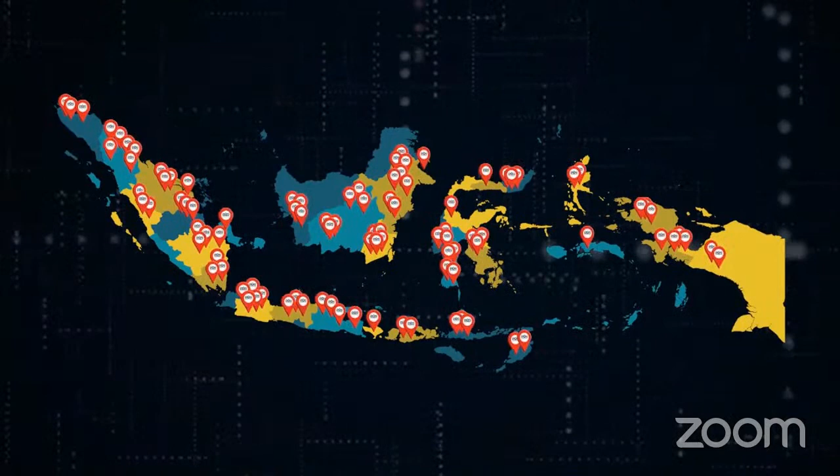PT Multibangun Rekatama Patria adalah perusahaan nasional yang bergerak di bidang industri geosintetik. Sejak didirikan pada tahun 1998, perusahaan ini telah menangani ratusan proyek yang tersebar di seluruh Indonesia. Dengan pengalaman yang dimiliki, menjadikan PT Multibangun Rekatama Patria dipercaya menangani proyek-proyek dari perusahaan multinasional milik pemerintah dan swasta. PT Multibangun Rekatama Patria selalu menjaga kualitas material dan pekerjaan dengan didukung oleh tim yang kompeten dan berpengalaman di bidangnya.

Visi PT Multibangun Rekatama Patria adalah menjadi pemimpin pasar dalam industri geosintetik di Indonesia yang selalu bersaing dengan sehat. Misi PT Multibangun Rekatama Patria adalah menjalankan kegiatan perusahaan dengan standar etika yang tinggi dan bermartabat disertai dengan kejujuran dan integritas. Meningkatkan kesadaran pengguna produk geosintetik untuk memilih produk dan solusi yang tepat atas masalah proyek yang dihadapi. Menjual dan melakukan pemasangan produk-produk geosintetik yang berorientasi pada kepuasan pelanggan dengan memberikan pelayanan berupa material berkualitas dan jasa pemasangan oleh tenaga-tenaga ahli dan berpengalaman. Mengembangkan perusahaan dengan sumber daya yang modern dan profesional.

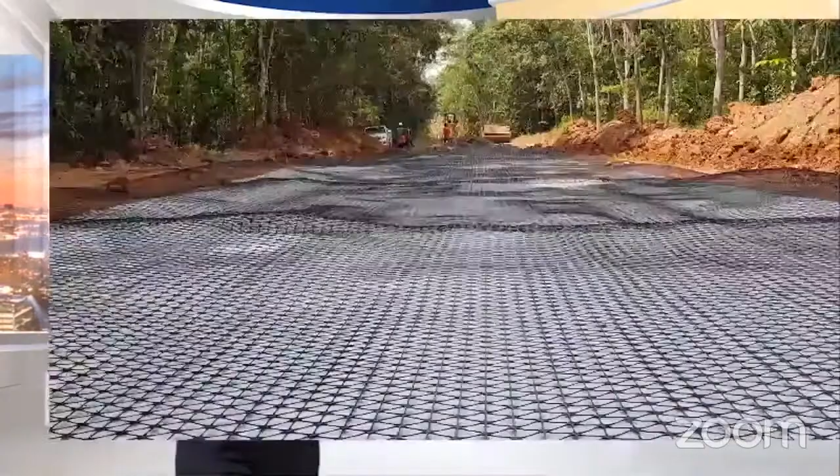Produk-produk PT Multibangun Rekatama Patria. Produk Tensar System terdiri dari Geogrid TriAx, terbuat dari bahan polipropilin berkualitas yang berfungsi sebagai stabilitas tanah dasar, khususnya pada tanah lunak. Multi-block retaining wall system merupakan sistem konstruksi dinding penahan tanah segmental, perpaduan antara modular blok beton sebagai facing dan tensar uniaxial geogrid sebagai perkuatan tanah.

Geomembran. Geomembran terbuat dari polimer plastik yang bersifat kedap terhadap cairan. Kami juga menyediakan produk-produk geosintetik lainnya seperti geotekstil, material drainase, serta geosintetik clay liner yang menjadi solusi bagi proyek-proyek Anda.

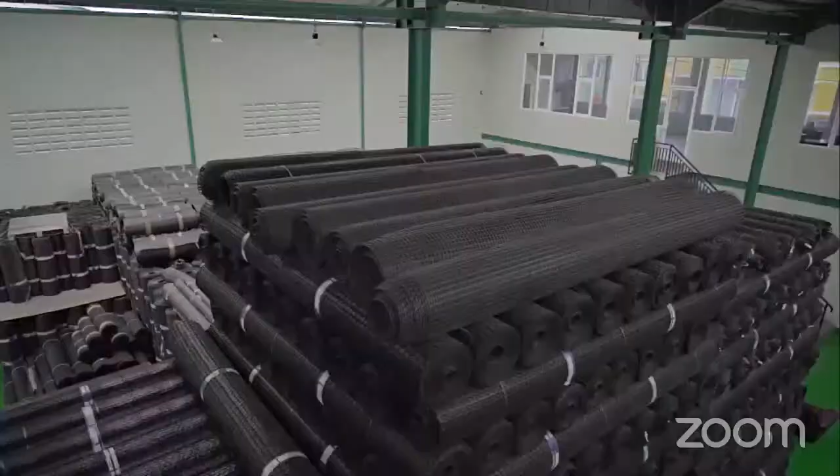Gudang PT Multibangun Rekatama Patria hanya 5 menit dari gerbang tol Bitung Tangerang, sehingga memudahkan akses pengiriman material. Gudang PT Multibangun Rekatama Patria terletak di kawasan pergudangan pengembangan kawasan terpadu 2, Bitung Tangerang, yang mempunyai luas 3.300 meter persegi yang dapat menampung material geosintetik dengan pengaturan dan penyusunan material yang tertata rapi.

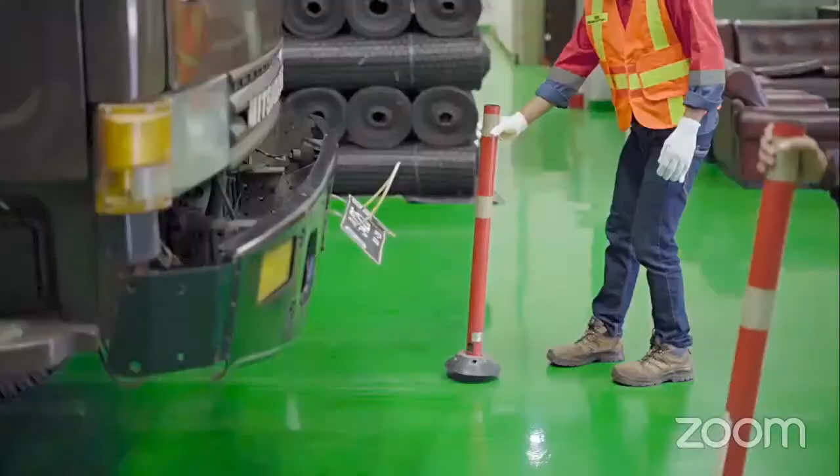Serta pengoperasian alat dengan tenaga profesional. Kami pastikan material geosintetik tetap terjaga kualitasnya hingga sampai di lokasi proyek. Selalu ready stock dan pelayanan profesional adalah komitmen kami.

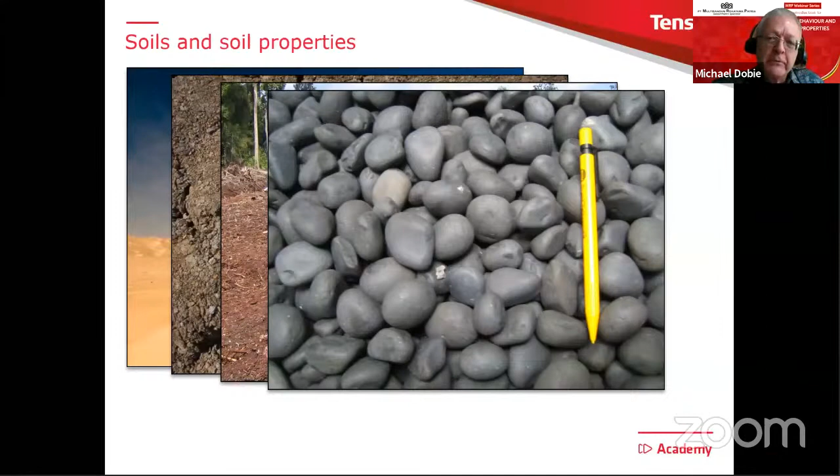So, soils. Soils are incredibly varied materials. We see some interesting pictures here: a sand dune, an expansive soil, peat, a river gravel - you can see it's rounded - and a microscopic view of clay minerals. I think what you can see from those five pictures is that soils are very varied, so understanding their properties and using them as engineering materials requires a very good level of understanding of how these materials work.

I'm just going to put a timer on so that I know where we've got to.

So, who should be listening to this webinar? Well, first of all, I should say I'm not trying to teach soil mechanics. What I'm trying to do is provide some basic information, and I want to illustrate it with examples from real soils and real experience. If you like, it's some of the lessons that I've learned over many years, which I think are important. There'll be a mixture of some simple explanations and also some more advanced concepts.

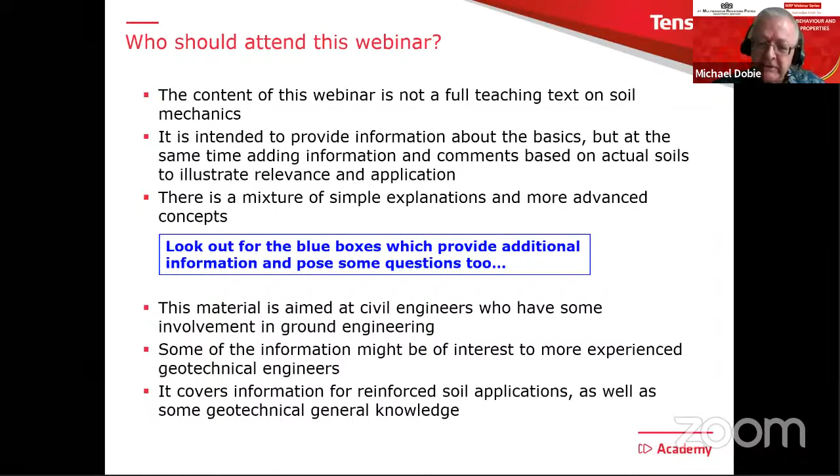Please look out for these little blue boxes. The idea of these blue boxes is that they will either add some extra information or maybe pose a question, and maybe that question could be part of the quiz later on. This is aimed at civil engineers who have involvement in ground engineering, which, to be honest, should be most civil engineers. It might be useful or interesting to more experienced geotechnical engineers too. Although I'm really concentrating on fills, especially fills to be used for reinforced soil, there's a lot of general geotechnical information presented as well.

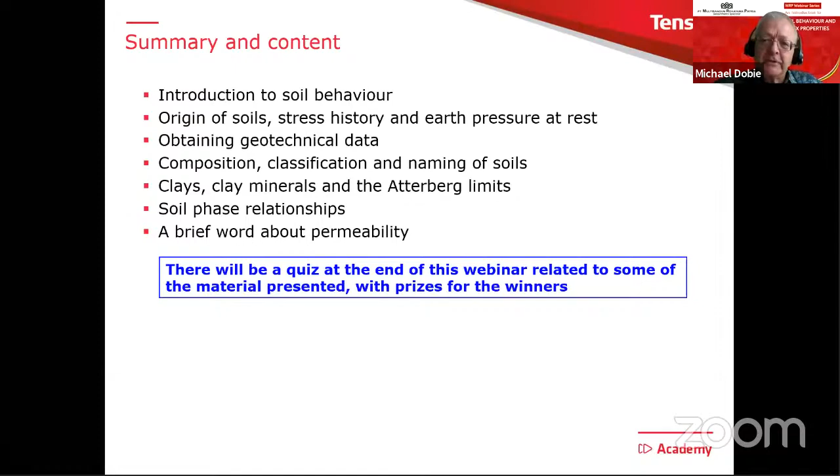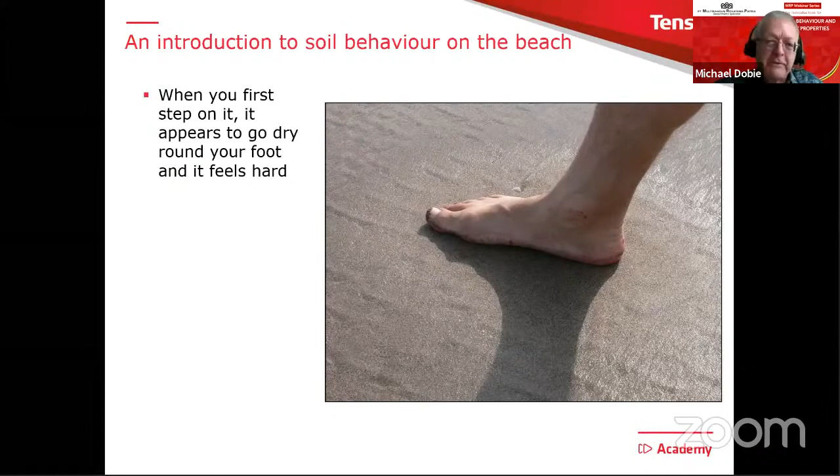There is this sand with a film of water on top, and down comes your foot. When you first do that, two things happen: first, the area around your foot goes dry - the film of water disappears and it feels hard. It's really interesting to try that out one day if you're walking down a beach in that particular location. Then when you lift your foot up, you'll see a little film of water left behind.

So let's do it again, just to be quite sure. Down goes your foot. With any investigation, you've got to be a bit careful about your boundary conditions, and in this particular case, something went wrong - that was a failure, that experiment.

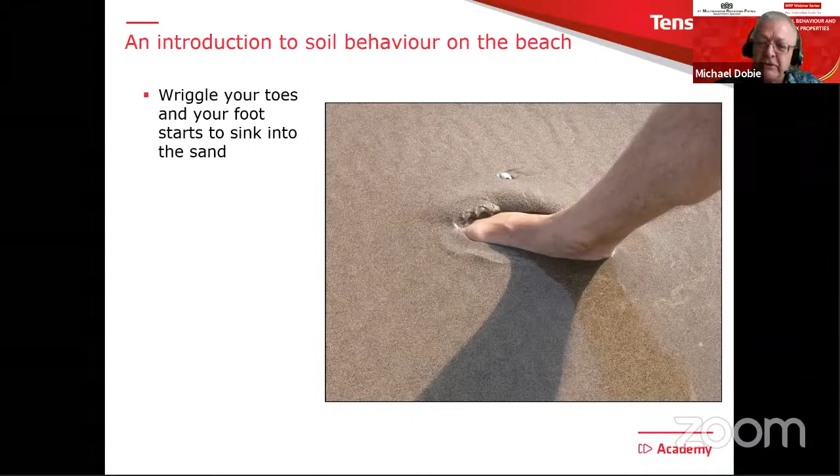So one last try. There's the beach again, the sand. Down goes our foot - it goes dry, we get a dry area around the foot, it feels very hard. But if we then wait just a few seconds, we start to feel the sand getting softer. We wait a little bit longer and slightly wriggle our foot, and our foot can simply disappear into the sand - a very major change in properties. This was a successful experiment, but can you explain it? In fact, hidden away in that behavior are quite a few important principles of soil mechanics.

We'll certainly try during these webinars to talk about most of them. But it's not quite the end of the story. That was Kuta Beach, and if we travel east about 120 kilometers, we come to a very interesting beach on the island of Lombok, Tanjung Aan.

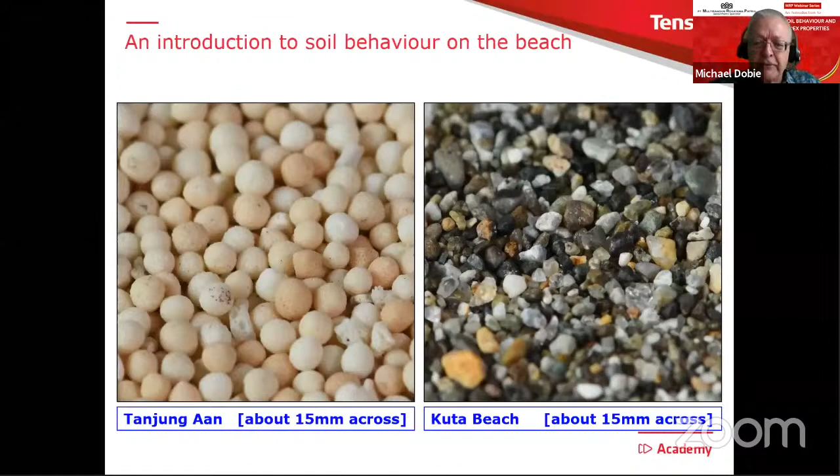A few words on the origins of soils. These are words that you will often hear, so let's be quite quick about this.

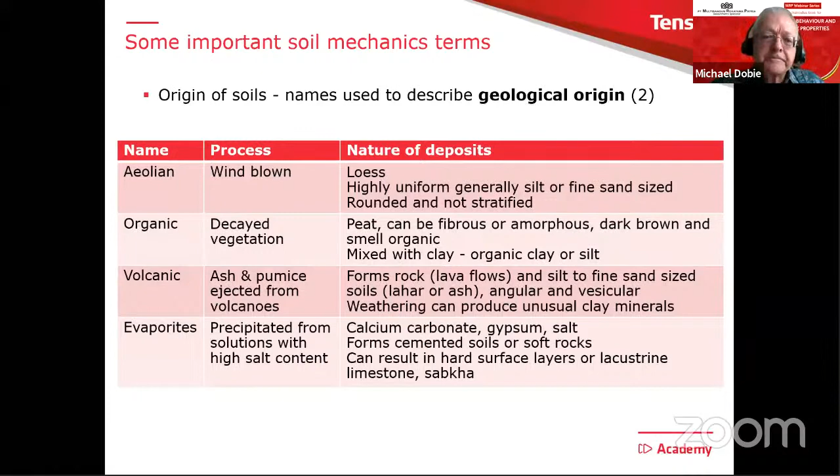One other thing I think it's interesting to be aware of, especially when we look at the marine clays all around the coastlines, or around many of the coastlines of Southeast Asia - for example, the north coast of Java, parts of Sumatra and elsewhere - we have these marine clays. Also, if you're from Malaysia or Singapore, you'll be very familiar with the marine clays.

Just a couple of minutes on these, because they are such important deposits and they affect many infrastructure developments, because they are all around the coastline where we have flat land near the coast where we might want to make developments.

One thing that's really important is the effect of sea level changes on the deposition of these clays. The two main ones we normally think about are the upper and lower marine clays, which we find around the coast of Southeast Asia, and it's strongly related to sea level.

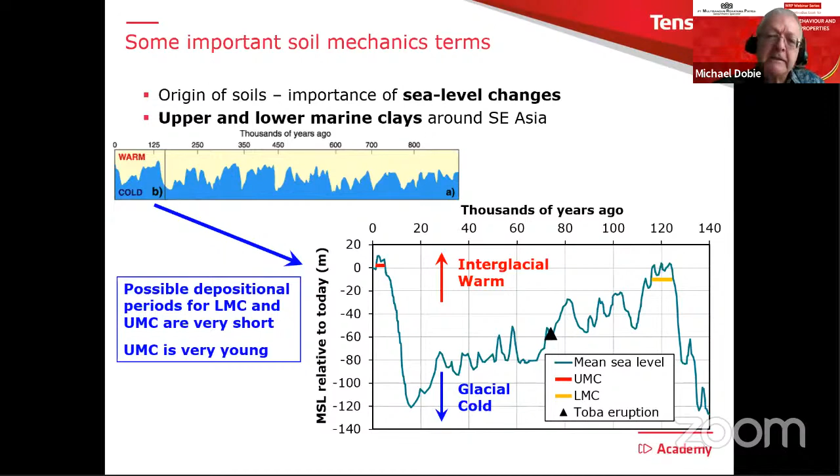And of course, this affects deposition of marine clays. In fact, the only possible times when they could have been deposited are indicated by the yellow and red bars, which you can see up around sea level. So that is the point in time when they could have been deposited. What this also means is that the upper marine clay, indicated by the red line, when it was deposited, is very young.

And I have this really nice picture, which was taken from some sampling I was involved with in Singapore a long time ago, but it's a Delft continuous sample taken right through the marine clay deposit in Singapore. And it would be very similar if you did it here in Indonesia.

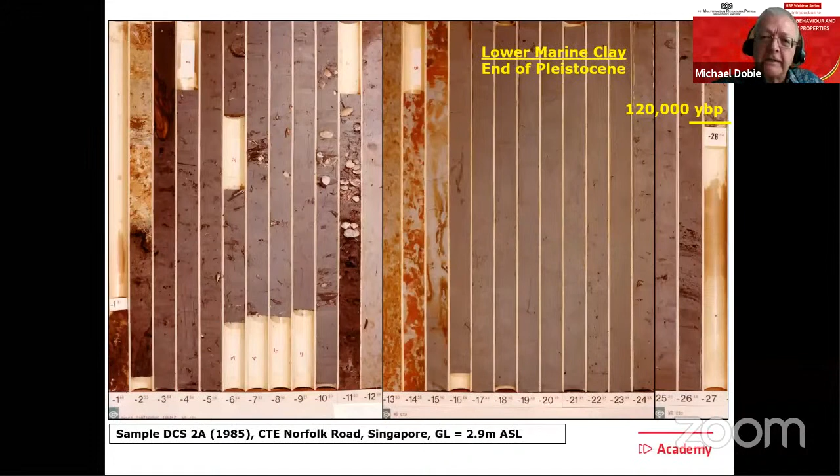So what we have down at the bottom there is about 120,000 years ago, and the sea level was high, so a marine clay could be deposited, and we call this one the lower marine clay. But at the top of it, what happened between 10 and 100,000 years ago, the sea level dropped and that became a land surface. The reason why we see all that coloration is that we get oxidation going on from the effect of sun and weathering at the top of the deposit. And in fact, if you look at the very top, you see that dark brown color, that is an old topsoil. So that was an old land surface.

And then we had the end of that glacial period. The sea level rose quite quickly, and then we got deposition of the upper marine clay. That was deposited between 3,000 and 8,000 years before present. You can see there how we have shells in the bottom, and then we have a more uniform looking material as we go further up. So this is a very nice calibration of what we see when we look at samples in the marine clay, and I think it's quite interesting to see that.

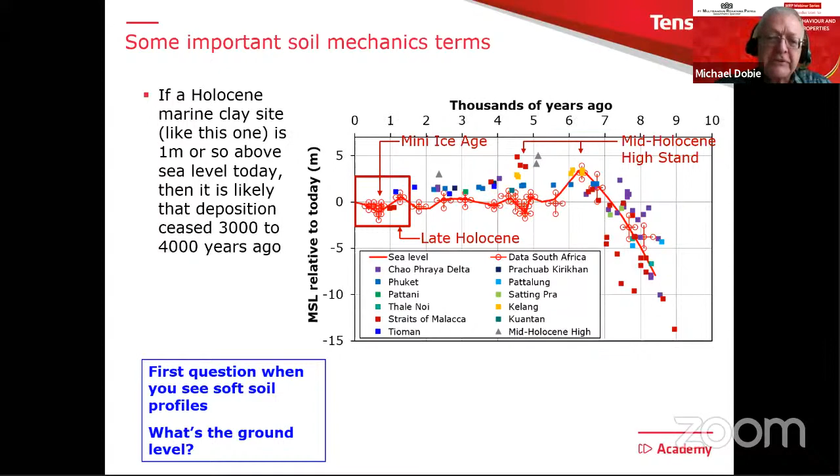So one important point to ask, whenever you're looking at profiles of soft clays, which we often do in this part of the world, it's important to understand whether or not they're marine clays, because then you'll have an indication of their likely properties. An important question is, what's the ground level? Because if the ground level is more than about 2 or 3 meters, it's really not possible that they could be marine clays. They would have to be formed in some other depositional environment.

So this is slightly associated, but there are some important terms that we often see in soil mechanics: normally consolidated and over-consolidated. I thought it was worth spending a couple of minutes looking at this and seeing how it affects soils. So it's all to do with stress history.

So let's imagine we have a site a long time ago, and we have a soil sample down the bottom there, the little blue square. At that time, there's a certain depth of burial, H, and a certain water level. From that, we can calculate the vertical effective stress. Because it's the maximum that this soil sample ever felt, we'll call it sigma dash max, or we can call it the pre-consolidation pressure, which we'll come to in a minute.

So time goes on, and through some geological process, the ground level drops. Material is eroded away until we get to today. If this is the situation today, then the vertical stress on our sample has become smaller. There's a rather important ratio between that maximum value in the past and today's value, which we call the over-consolidation ratio, simply the ratio of those two values. This is a very important thing to know about when you look at soils, whether they're soft soils or other types of soil. This is something important to understand.

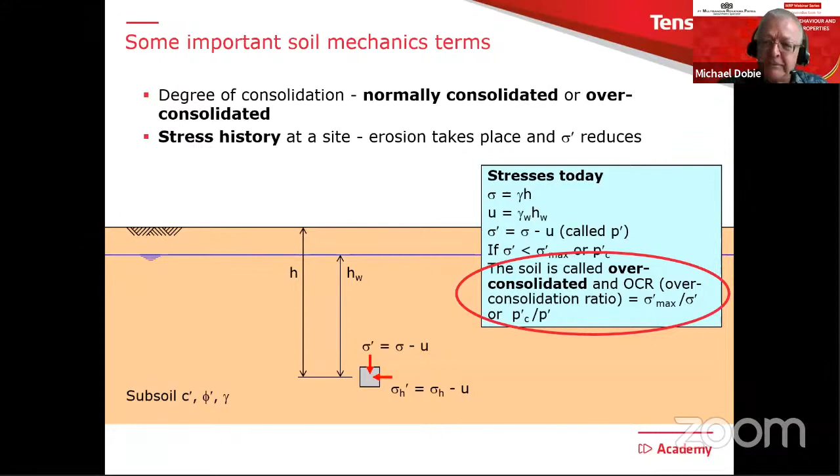Something else we'd like to know, especially if we're doing finite element calculations, is what's the horizontal stress? The horizontal effective stress is related to the vertical one by what we call the earth pressure at rest. We use a particular symbol K0, which is the ratio of the horizontal to the vertical effective stresses. And this K0 value is strongly related to the OCR, the over-consolidation ratio.

There are a number of ways you can measure PC for soft clays. We can use the oedometer, which we'll see in a minute. But this is not so easy for stiff clays. I'm going to use here an example of London clay. You might say, why London clay? Well, I studied in London, so I think it's reasonable I should do that. Let's have a look.

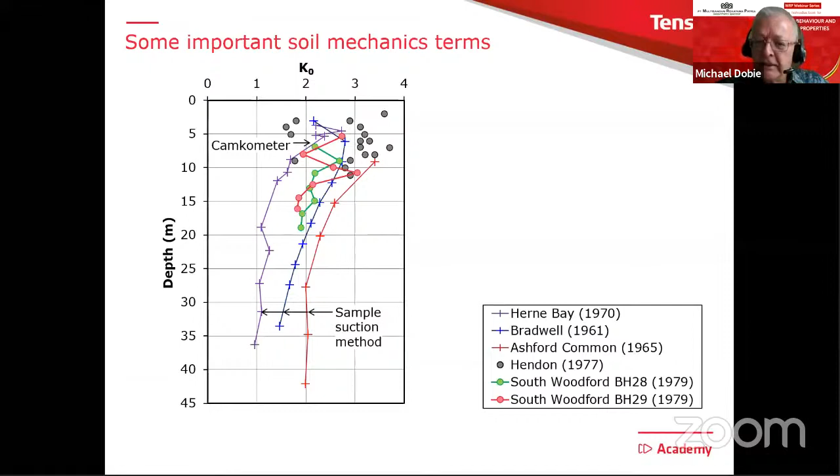This is a profile of the K0 value measured in London clay by a variety of techniques at a variety of locations around London. You can see that K0 is very high. This means the horizontal in situ stress is much higher than the vertical one, up to 3 times. It's been measured in a number of ways, but what's important really are the values we see.

Now I can relate that to the OCR using an expression like that. There are many variants on this kind of expression. They are empirical in nature, but they still give us an idea. I can translate that into OCR, the over-consolidation ratio, and you can see it's very high, up to 100 times at the top of a deposit like the London clay. So that's a heavily over-consolidated clay.

But if we have a site where the current stress is the same as the maximum past stress, OCR is 1, and then we call the soil normally consolidated.

So we can determine this quite nicely from oedometer tests. Here I have a profile of the over-consolidation ratio for a Holocene marine clay, actually in Malaysia. You can see that once you get below a desiccated crust, the values are very low, close to 1. Those are determined from looking at the results of oedometer tests.

I can then transfer that to K0 using that same sort of expression. You can see the K0 value, again once you get below about 2 meters, is around about 0.8. This is very, very different to London clay.

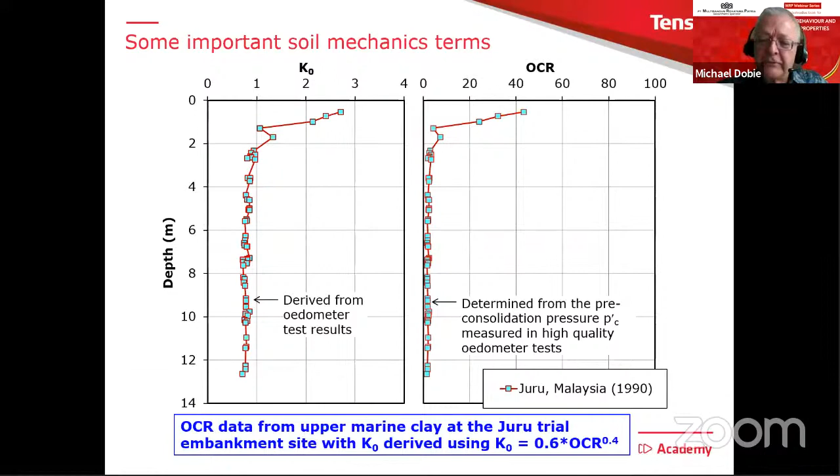If I quickly jump back to the London clay profiles, just to see how different they are—the scales on the upper axes remain the same. Here we go, there's London clay, hugely different. This probably is a very good clue as to why those two clays have significantly different properties, and we might have a question about that later on.

You can also get over-consolidation taking place due to a rise in the water table level. Not a huge effect, but it can happen.

One thing to be aware of is that this whole concept of normally consolidated and over-consolidated really only applies to alluvial soils, and maybe glacial ones where you had the weight of a glacier on top of them. In many other soil types it doesn't really apply, and it's important to realize that, because sometimes people try to use this idea of over-consolidation ratios in residual soils, and it doesn't really work very well.

So just a few summarizing words here. Stress history in soils is very important, especially if you're using finite elements to model them. True normally consolidated soils are not often found. Most soft soils we see, like the marine clays, would be very lightly over-consolidated. We can find under-consolidated soils, generally in things like river deltas, like the Mahakam Delta, where ongoing deposition creates some under-consolidated soils. It's also possible to find heavily over-consolidated soils near the ground surface, like London clay, and they're quite stiff.

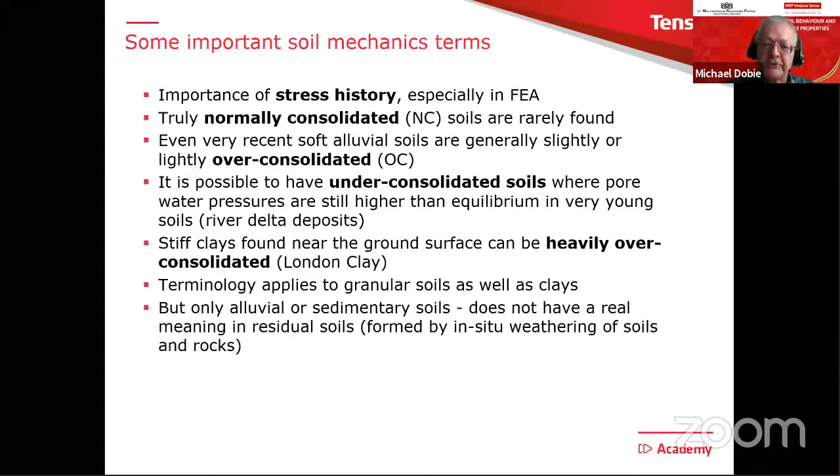But this terminology can apply also to sands, although it doesn't have such a marked effect. Just a reminder that it principally applies to the alluvial or sedimentary soils, this whole idea of over-consolidation ratios and so on. As I mentioned, stress history, when you're doing FEA, finite element analysis, it's important to get that right in your foundation soils.

A few words now about geotechnical site investigation. I'm not going to go into this in detail, just a few words, and in later webinars we'll look at a bit more detail on some techniques for doing site investigation. But the main target is to find the distribution of soils at your project site and the soil properties appropriate to the structures you're designing. That's important, because you can spend a lot of time and money testing soil properties and then find out they're not useful. So you need to make sure that what you're measuring is what you need to know for the particular project or structure you're going to design. Of course, we want to get the best possible results.

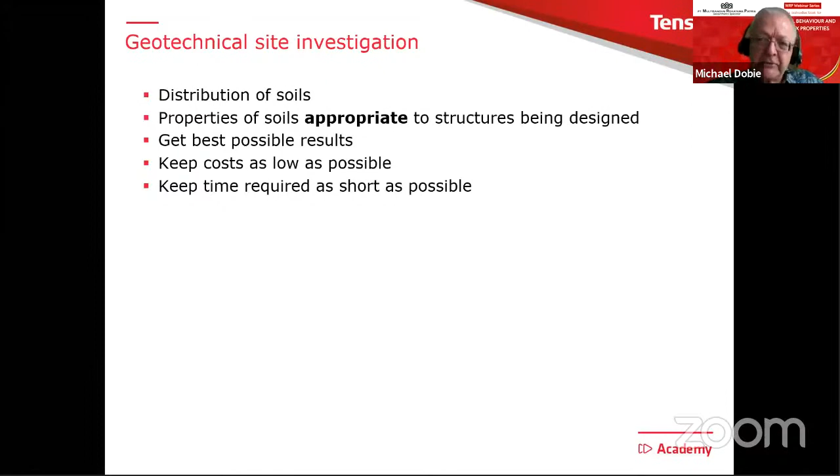We want to keep costs as low as possible, and we want to do it quickly, because no one wants to spend too long on site investigation. This can all be optimized, and some of the techniques we'll talk about in a later webinar will look into that. Of course, one quick source of data is to have a look at geological maps and other published information.

But probably what most of you will see is geotechnical reports. And I think really these webinars are aimed very much at engineers who receive geotechnical reports, and then they have to make use of that data in their project and in their designs.

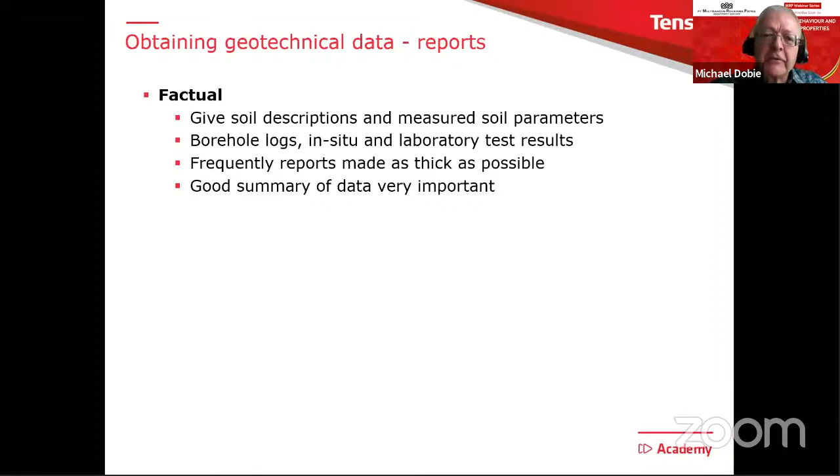So there are normally two types of report. There are factual reports, and these give descriptions of soils and measured parameters, borehole logs, maybe the results of in situ and laboratory testing. And it seems to be the case, especially in the good old days of paper versions, that there was a target to make these as thick as possible. Therefore, one important skill is making a very good summary of the information in these factual reports.

The second kind of report is an interpretative or engineering report. Here, what should be happening is that the author takes the factual data and gives you an interpretation of the important parameters. For example, like the undrained shear strength, C' and Phi'. They may give comments on stability of slopes and foundations, or provide you with allowable bearing pressures.

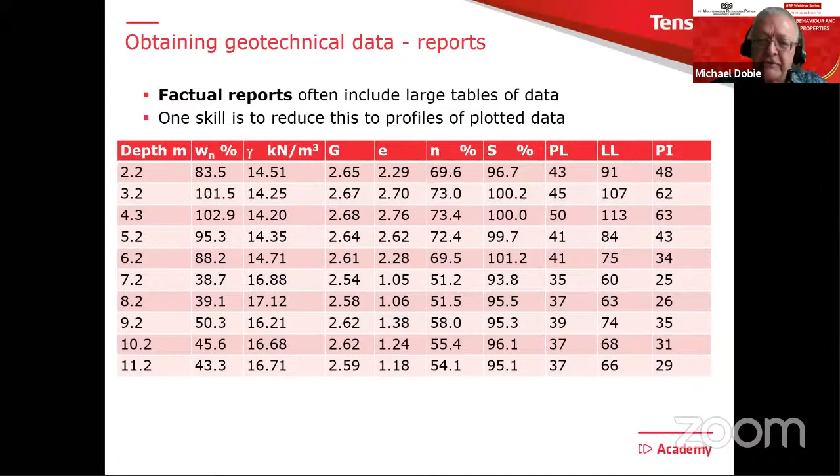And also in these reports, you frequently have large tabulations of data. And the only point I want to make here is that if you're an interpreter, if you want to use this information, it helps greatly if you can summarize this into a small number of plotted profiles or similar graphs, because you can see everything so much more quickly. And that is something which we need to look at briefly.

So the skill of doing this is important. These days, we have wonderful programs like Excel, where it's fairly easy to put this information into those programs and derive that kind of result.

Now let's move on a bit now and talk a bit more about soil parameters. And as I said, I'm particularly interested in reinforced fills. So I'm just mentioning them and showing you a picture there. So obviously, when we're designing any kind of earth structure, with or without soil reinforcement, the properties of the fill are going to dominate its behavior.

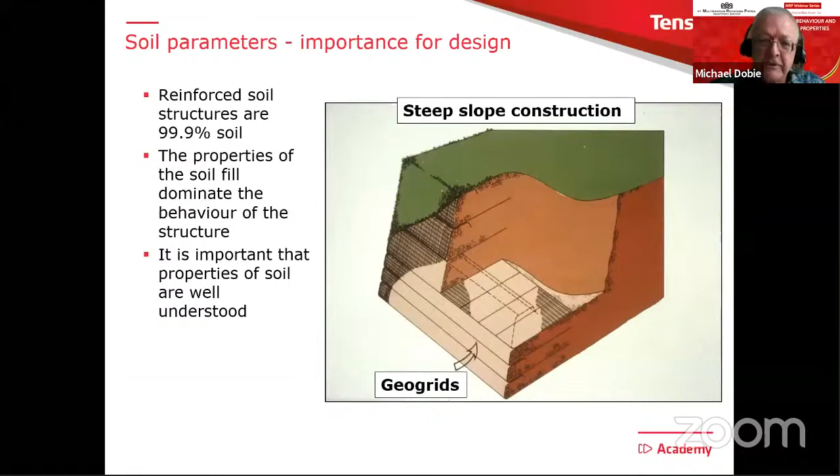So we need to understand them well. Therefore, it's important that we take adequate samples and we carry out appropriate testing. And that's what we'll start to look at now.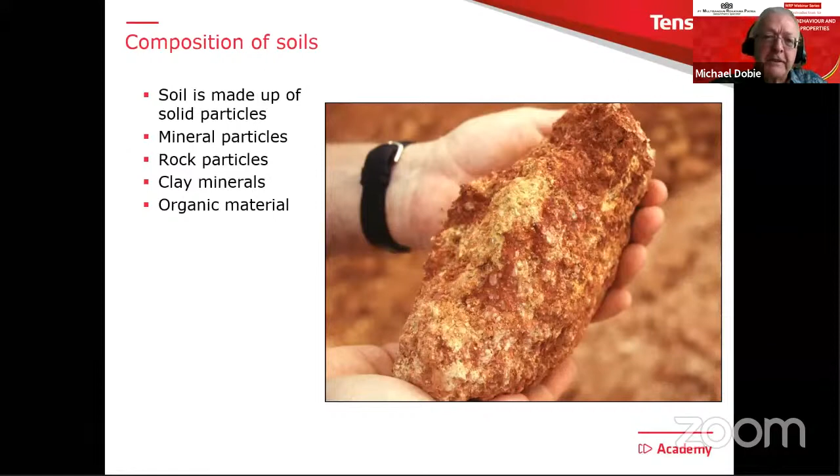Here's a nice sample of soil. It's actually a piece of weathered granite from a site in Malaysia. And it's made up of a number of different particles: mineral particles, rock particles, maybe clay minerals, maybe some organic material. So if we look inside it and we look at the particles, we're going to have some large ones, and then some smaller ones, and some even smaller ones, and some very small ones.

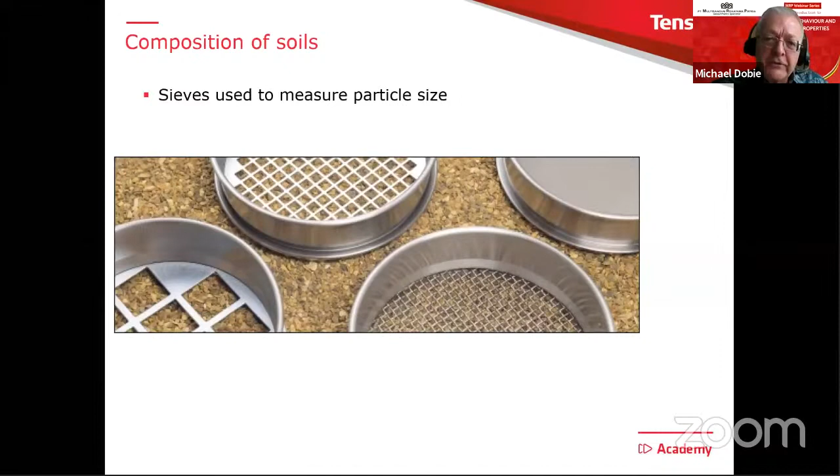And a very nice way to summarize that data is to carry out what we call a sieve analysis, where we use sieves, which look like this. These are very nice clean ones because they're from a catalog. And we pass the soil through there to find out the arrangement of the different particle sizes. And if we're lucky, we have a thing called a sieve shaker to do it.

Now, sieve shaking, or the sieves, are used basically for the sands and gravels down to 0.06 millimeters. And the particle sizes give us the principal names of the soils. So we have here boulders, cobbles, gravel, sand, silt, and clay, and they're each determined by the range of particle size, which I don't need to read out. But just to make a point that this is one particular system, there are other systems you can find.

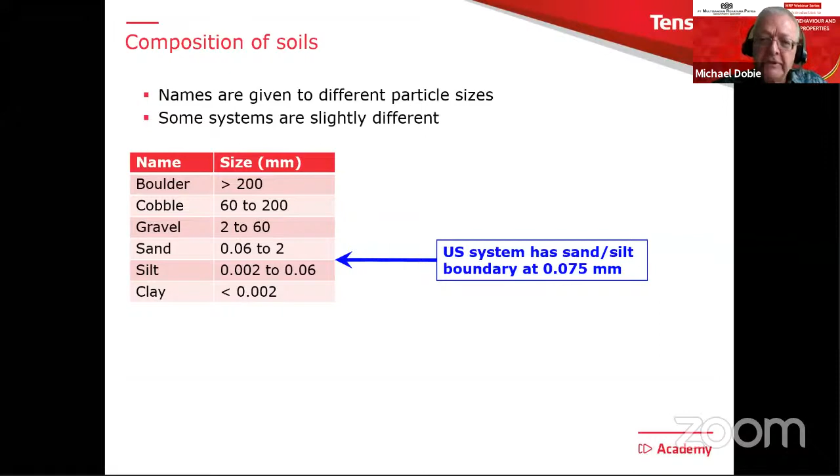So, for example, the very important boundary between sands and silts, which is between the coarse and fine soils, can be different. You might find it in other areas, like at 0.075 of a millimeter in the US system, but it's not very different. We normally subdivide to get coarse, medium, and fine in the gravels, sands, and silts.

In this system, it's easy to remember because it's all 2s and 6s. If you remember the top end of the sand range is 2 millimeters, everything else follows from there, and it's quite easy to remember those various ranges. So if I add some data here from three samples - a green sample, a brown sample, and a blue sample - I can arrange them in that way, and that's quite interesting.

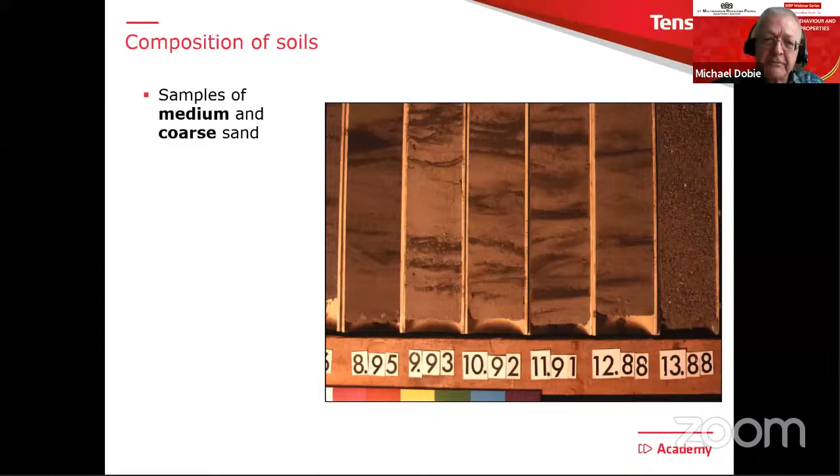Here are some pictures of some coarse soils. This is quite unusual - to see undisturbed samples of sand. You've got here some medium and coarse sands sampled at a site in the UK. These were taken with a special kind of sampler, the same one I used for the marine clay earlier on, and you can actually see what the sand looks like in an undisturbed form. Not easy to do that.

Some other terminology now: uniformly graded. We use that term when the particles all have much the same size, like we had on the beach in Lombok. This particular picture shows railway ballast, which is a man-made aggregate. But if you have single-size materials, they're not very good as fill materials.

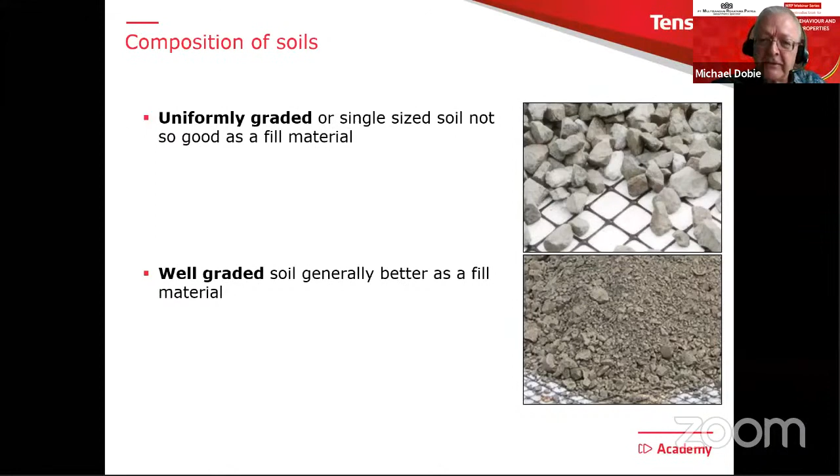The other picture at the lower half of this slide is a well-graded soil, where we go from fine soils all the way up to coarse ones. Generally, well-graded soils are much better as fill materials.

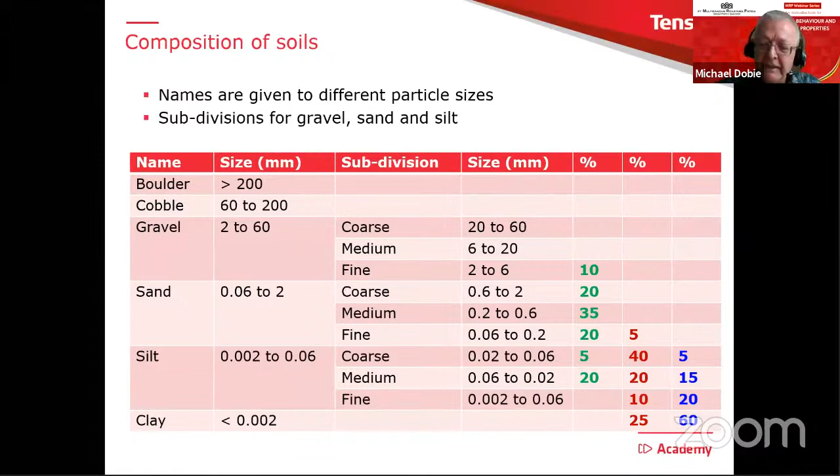For the coarse soils - which we normally separate from fine soils - the coarse ones are the sands and gravels, and those we can investigate using sieve analysis. But when we get down to the finer soils, we can also use a technique to measure their particle size.

It's a bit more complicated and not such an easy test to do, but to be quite honest, if I had to make a choice between Atterberg limits and measuring the particle size of fine soils, I would use the Atterberg limits every time, because they tell you a lot about the nature of the soil. When looking at clay soils or potential clay fills, the first thing I like to find out is what are the Atterberg limits. These are very useful properties to help us understand better how these soils are likely to behave.

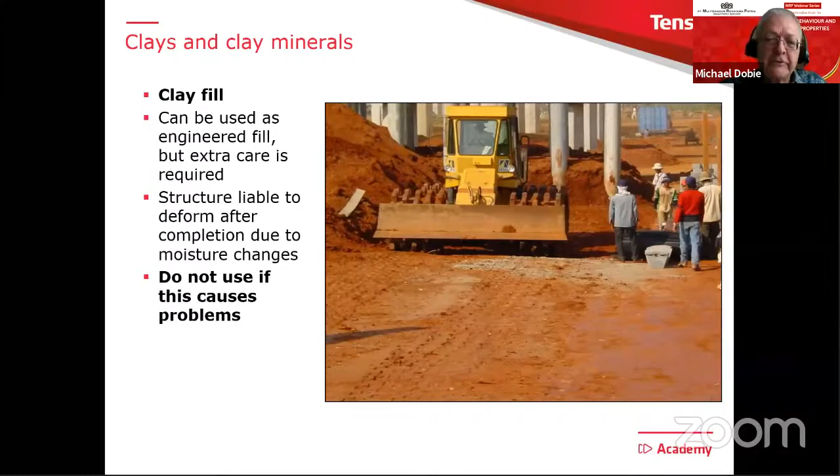This is actually the wonderful tanah merah that we have here in many parts of Indonesia. It's a clay fill derived from volcanic material. It has particularly good properties. We'll mention that again in a second.

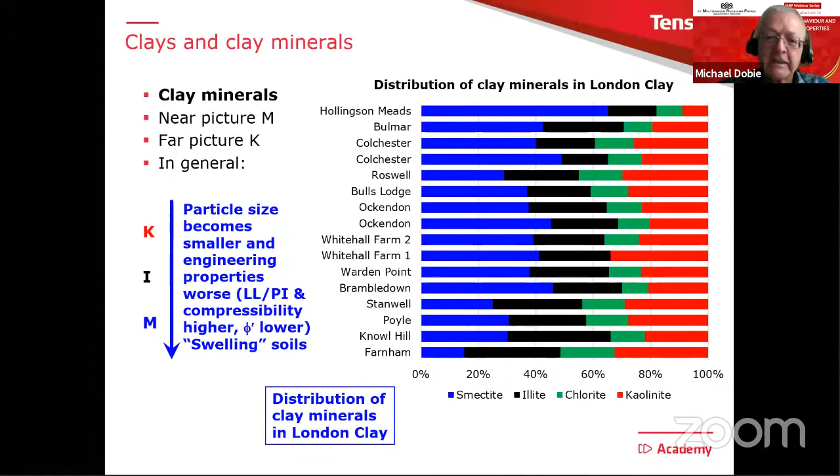Here we are. This is an Indonesian soil, somewhere near Surabaya. It's a very expansive soil. You can see that from the wide cracks on the surface during the dry season. That can cause problems because it allows water to get deep into the soil. And you can see here how we have a very low angle slope failure going on, caused by the nature of these expansive soils.

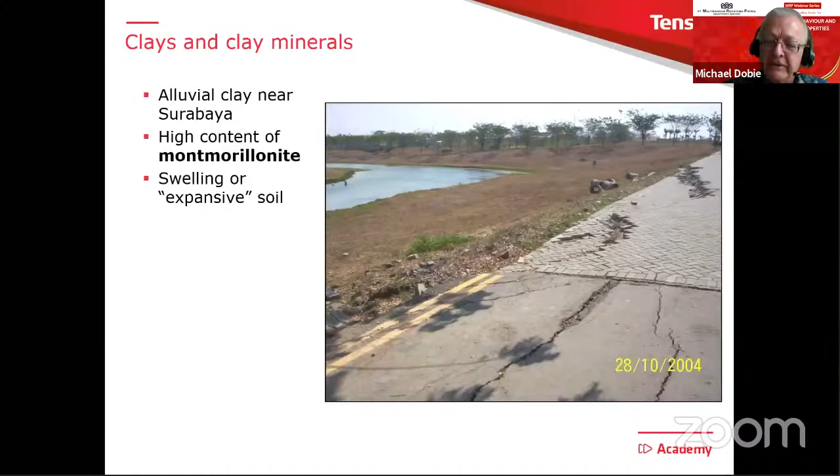A few more electron micrographs, but there's some quite interesting ones here. This is the marine clay in Singapore, Kallang Formation. We can see nicely there that scale bar, 10 microns along there, and you can see a variety of particles, lots of little platy particles in a kind of variable arrangement. But we also see what I call a loaf of bread, the bit in the middle, where that was probably a larger particle that has been weathered and reduced to a series of clay plates.

So the clay minerals end up being these plate-shaped particles, having this plate shape. However, we do find other kinds of small particles in the marine clay. Those little almost circular particles are actually what are called pyrite framboids. They're tiny, and I don't think the content is that much within a marine clay, but obviously they would affect the behavior.

So here's a little bit of advice: when you see data that is unusual, it's definitely important to question it, investigate it. But sometimes you need to be ready for something that's unexpected. And this is certainly the case in this particular marine clay.

Here's another clay mineral, and it's a very special one to parts of Indonesia. It's called halloysite. It's also a relative of kaolinite, but it forms these tubular shapes. Now, a couple of things going on here. First of all, you can imagine that these tubes all locked together could give a pretty good strength behavior, and indeed they do, but also they can hold a lot of water, and that's actually the case.

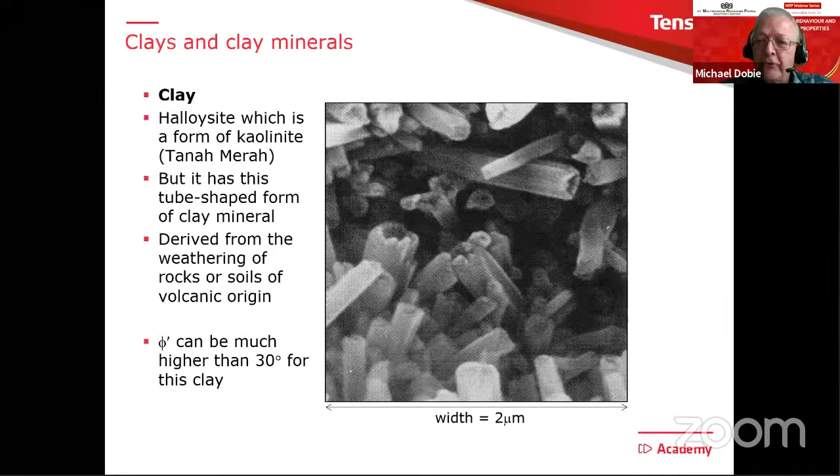Now, one way we look at these clay minerals is to measure the Atterberg limits. And the Atterberg limits, as I mentioned earlier on, are carried out on the particles smaller than 0.425 millimeters. So if we have a graph like this, where the horizontal axis is the water content and the vertical one is the remolded strength of a soil...

Maybe you've got it in your hand, then if you have a low water content, it'll feel quite stiff, but you can still mold it, and that would be something close to the plastic limit. But as you add more and more water to your sample, it becomes softer and softer until it essentially becomes almost a liquid, and we call that the liquid limit. Of course, we have specific tests for doing that. I'm not going to tell you how the tests are done today, but the difference between the two we call the plasticity index.

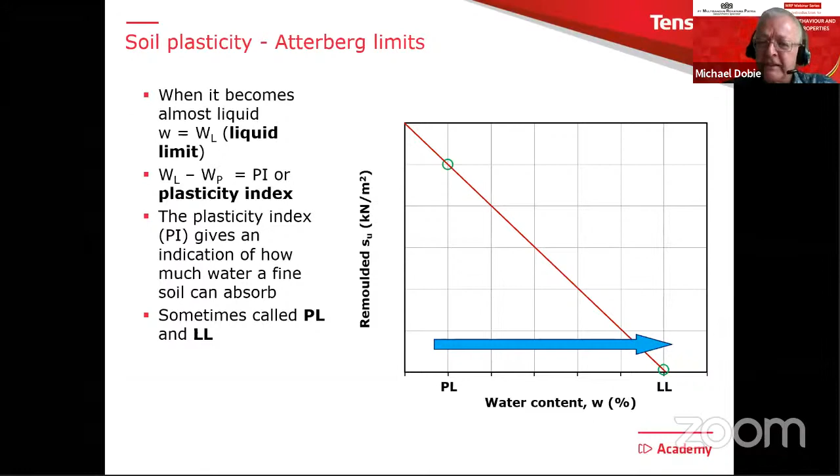Now, these are very useful numbers that give us some indication of the likely behavior of these clays. Sometimes we call, I've shown there these values as WL and WP, but sometimes people call it PL and LL for short, it's up to you. They have the same meaning, but don't forget they are water contents, but at a specific condition. We never put a percentage after them; we just say liquid limit of 100, and we know that means 100% water content.

The way we normally summarize these Atterberg limits is to plot them on what we call a plasticity chart, or a Casagrande chart, where we plot the plasticity index versus the liquid limit. We have this well-known line called the A line, the inclined line on the graph. I've shown here two test results from the United Kingdom, a glacial till and London clay. The point about this graph is that if you plot above the A line, the material is likely to be a clay, but if it plots below the A line, it's likely to be dominated by silt content.

And that's why we have this terminology CL and CH, ML and MH. You often see those names appended to soil descriptions, a CH soil, clay of high plasticity, and that tells us something about the likely behavior of the soil. There are some more complex systems than this one where you have many categories, but I'll just show the simple one here.

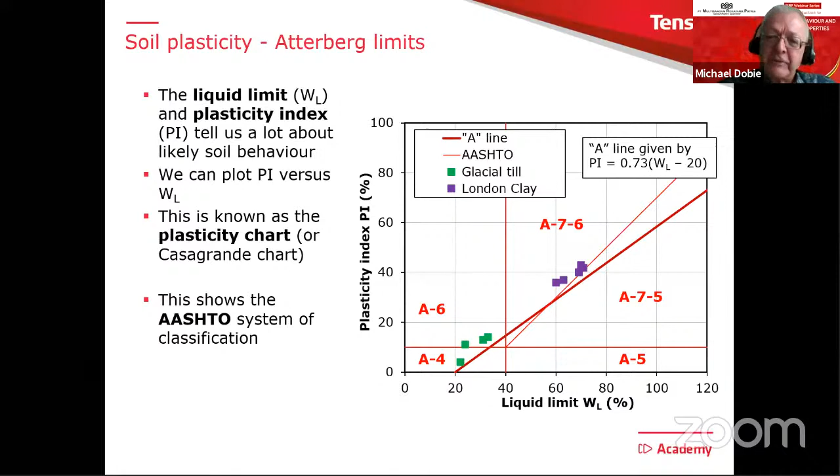One other system we can sometimes come across is the AASHTO classification system, where we have things like A7-6, A7-5, and so on. It's very close to that other scheme with the A line, so an A7-6 soil would generally be very similar to a CH soil from the other system.

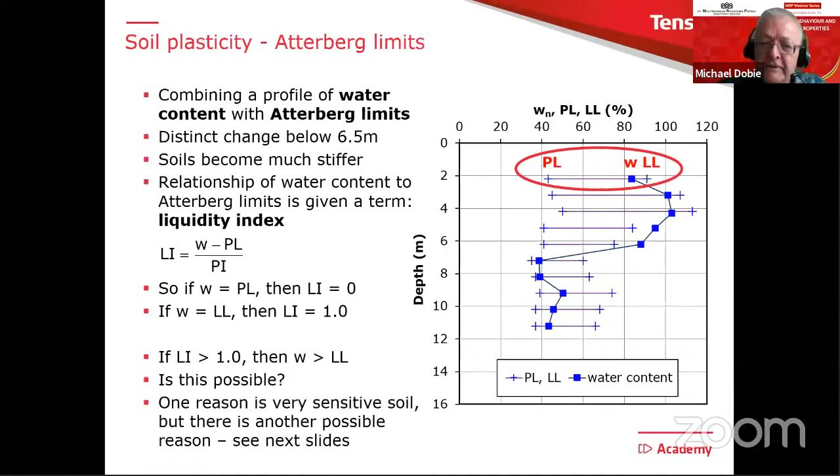aware of how they were prepared because it can affect the results very significantly. If I'm looking at a tabulation of Atterberg limit results, two things I'd like to know: what percentage of material passed the 0.425 millimetre sieve, and how was it prepared? Because this would help me interpret the results. Unfortunately, unless you really hunt back through the original laboratory data, you don't normally find that. But of course, if you're specifying a site investigation, you can ask for that information to be provided, and I'd recommend that you do.

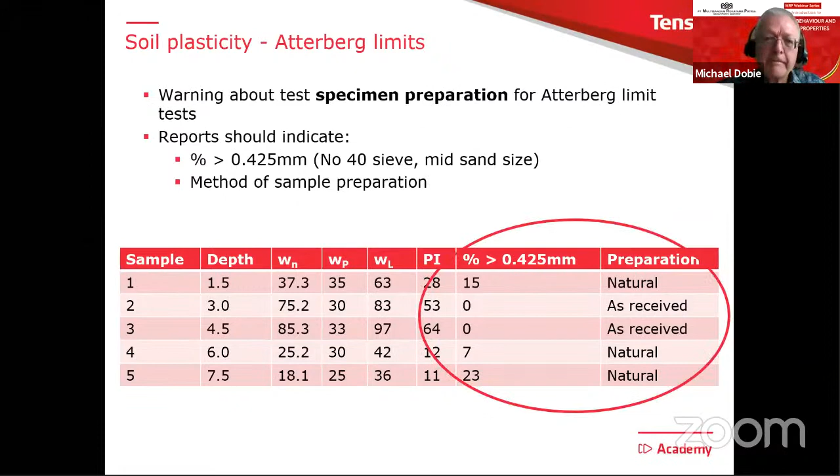So let's just look at the last little thing on Atterberg limits. Let's look at a couple of profiles, some real profiles, and we'll go back to our friend London Clay. There is a really nice profile of the Atterberg limits and natural water content of London Clay, and you can see that the water content plots very close to the plastic limit, down at the left end of each of those bars. And then, not surprisingly, we expect that soil to be quite stiff.

If I now compare that to the profile we saw earlier on, but this is a Holocene marine clay from Malaysia, then you can see now that the water content is plotting right over by the liquid limit. So these are clearly two clays that are going to behave very differently, but they are both marine clays. As it says at the top there, the difference is the London clay is extremely old and has a lot of stress history, whereas the Holocene Juru upper marine clay is very young, and the stress history is quite simple.

So this could be a possible question for you. We have a sample from a depth of 2 meters in both of those clays, and there's a water table or phreatic surface at 1 meter, and they both have C' of 2 kilopascals and phi dash of 26 degrees. This is very possible. But the London clay has an undrained shear strength of 100 kilopascals, and the Juru clay has an undrained shear strength of only 8 kilopascals. Can you explain that using soil mechanics? So this is a rather important thing, and again, there might be a hint there of one of our quiz questions to come a little bit later.

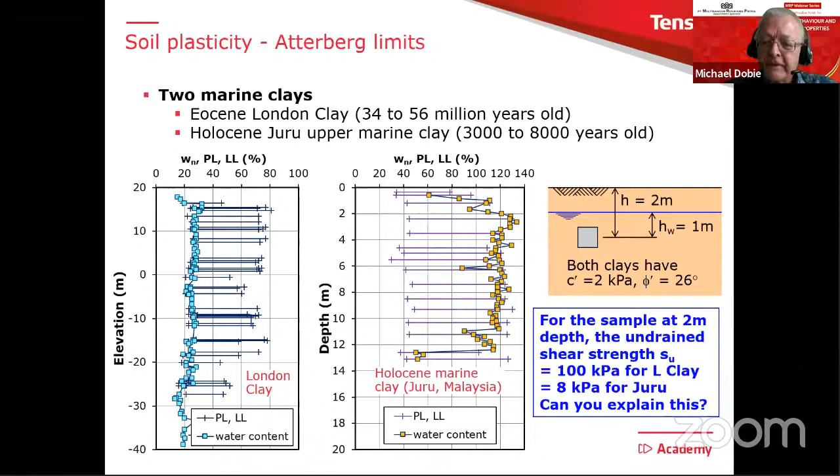We have soil classification systems where we take things like particle size and Atterberg limits and we classify them. I'm not going to spend any time on them - these are things you can find in soil mechanics books and other documents. I did mention earlier on the AASHTO classification system, which, although not a mainstream one for geotechnical engineers, because it's aimed at pavement and highway construction materials. Actually, I quite like the AASHTO classification system, but get to know them, be aware of them.

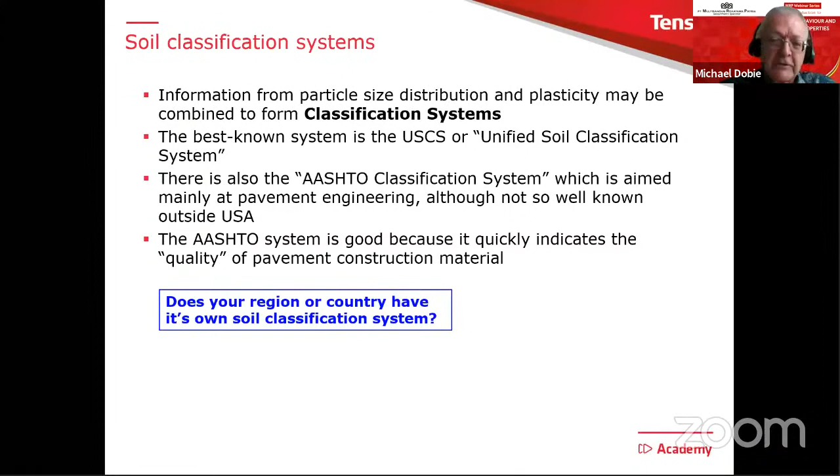If you never know what you're going to see in a report, and if someone says they've got an A75 soil, you shouldn't be surprised by that. You should realize, oh, that's from AASHTO and it's just below the A line. So don't be surprised by that. Be aware of the systems being used in your country or your location, or what's being used in particular reports that you are looking at.

Last little thing to look at for a few minutes is a bit of, if you like, undergraduate soil mechanics. It's to look at the soil phase relationships, but these remain incredibly important. If we have a nice image through some soil there, where the brown particles are obviously the solid bits and the white is the void, then we have this very important parameter, the void ratio. The void ratio is simply the volume of voids divided by the volume of solids. And for me, that's something I always want to know, especially when I'm looking at the more compressible and softer soils. I'd like to know the void ratio. In one number, it tells you a great deal about the soil.

Of course, those voids might be full of water, and if they're completely full, we call them saturated soils. Now, when it comes to our fills and engineering use of soils, a saturated soil would not be very good as a fill material. It would be very difficult to handle and place. So no, we don't want our fills to be saturated.

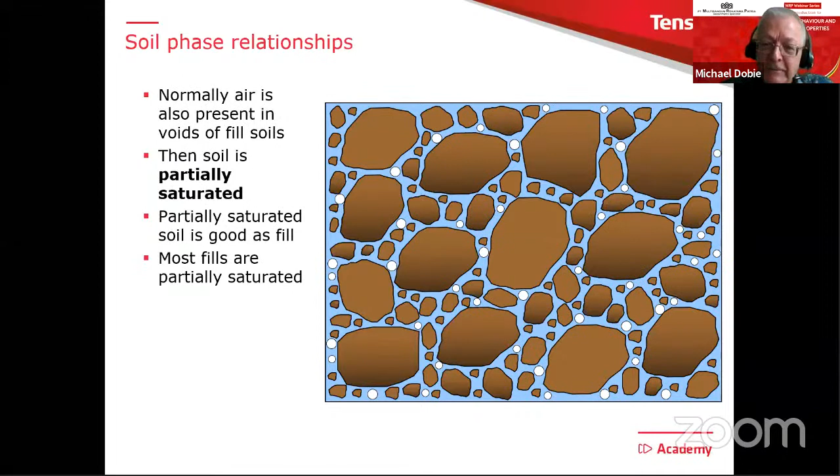Much more likely, especially in a fill, is that we have little air bubbles or quite a lot of air in it, shown as little white bubbles. Then we say that the soil is partially saturated, which will be the case in most fills. And that's a good thing - we want our fills to be partially saturated to improve the way they compact when we place them.

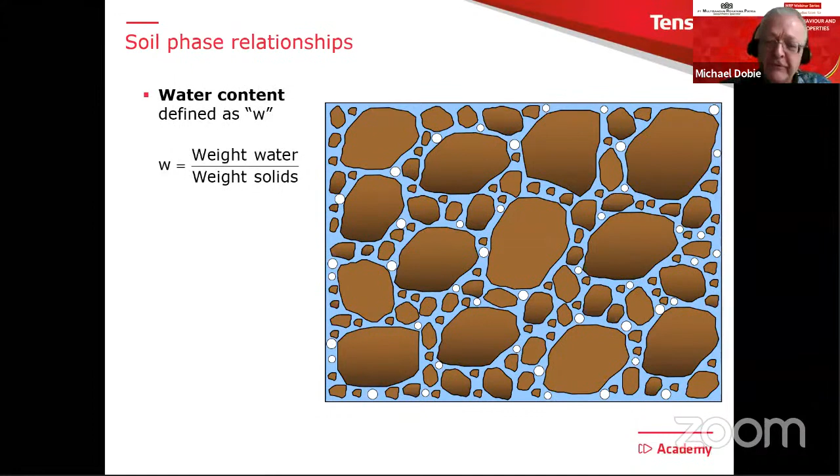The famous water content - simply the weight of water over the weight of the solids. I think we can all remember that. And then another one is the degree of saturation, which is a measure of the amount of air in a sample - it's the volume of water divided by the volume of voids. So if it's 100%, it's saturated, and if it's 0, it's dry.

The way we try to understand these - again, very much undergraduate soil mechanics - we have this nice little phase diagram where we divide our soil into air, water, and solids. By having a sample of some sort, we can measure the total volume and the total weight of the sample. We know the weight of air is 0, so we can find the weight of the water by drying it out and finding the difference between the total weight and the weight of the solids.

Then the other thing we measure in a soil is the specific gravity, which is the density of the solid particles related to the density of water. Typical number is 2.6, 2.7, something like that. We know for most soils it's going to be in that order.

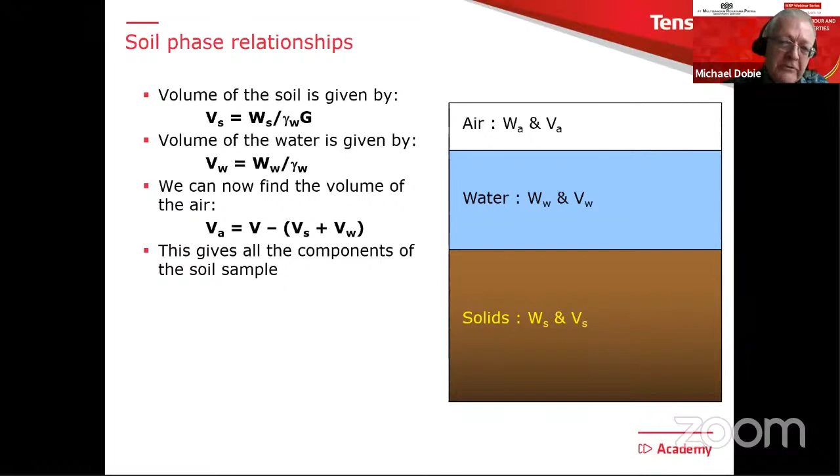So we can take these relations and make simple expressions. We know that the volume of solids can be calculated taking into account specific gravity. The volume of the water is easy. And then we can find the volume of air by doing that simple subtraction. This gives us the components of a soil sample, and we can derive other things from them.

Now, you need to be aware that when we get soil data in our reports, we only basically get three things measured: the density or unit weight, depending on how it's expressed; the water content, which we're always looking for in our report; and the specific gravity. Everything else, like void ratio or porosity or degree of saturation, is derived from those three using some of those clever relationships.

Now, I want to show two of these to you. I'm not going to try to explain them in detail - if you want to look at these, you can look at them later when you get a copy of these slides. But let's have a quick look.

Example one is to find a relationship between density and what is called dry density. Dry density is not a real thing - it's an imaginary density where we imagine that the water is missing, and we tend to use that when we look at compaction testing. By playing around with those various relationships, we find that dry density equals bulk density divided by 1 plus the water content. That's an expression worth remembering, especially because if you're looking to find unit weights of soils for your designs and you go to the compaction testing, those densities will be given as dry densities, so you need to convert them into bulk densities.

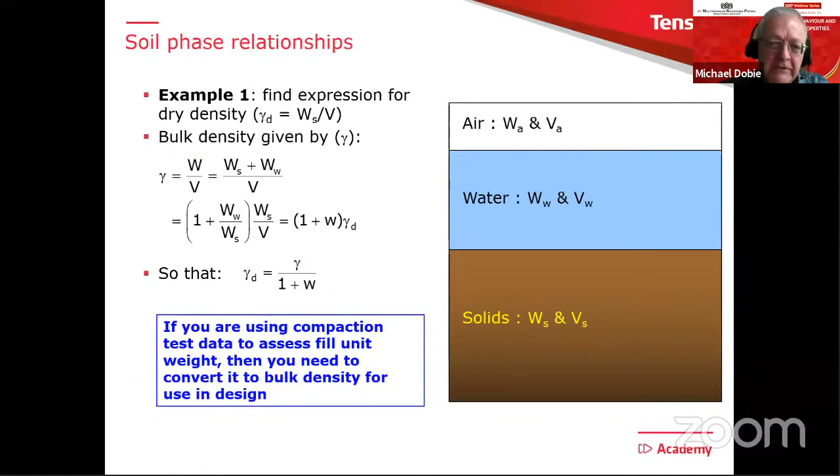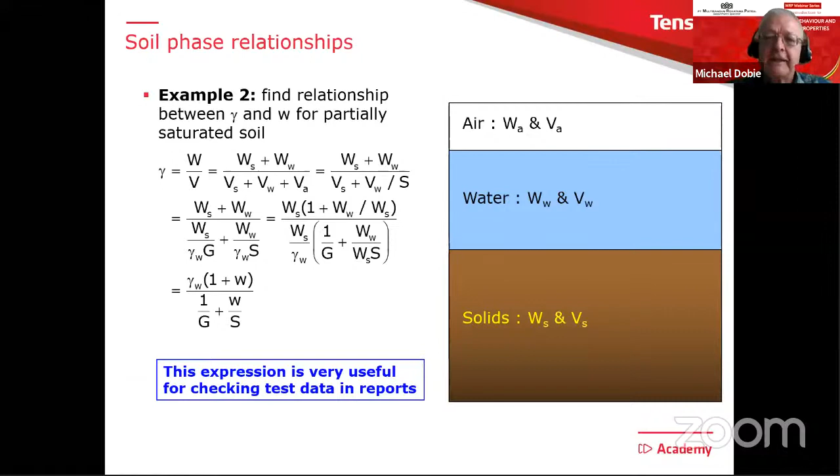Should they be fully saturated? Quite a useful thing to look at. Here are some typical bulk unit weights. In most fill soils, they're going to be in the upper teens or low 20s at the most. I think we know that, but there are some typical values for you to take into account.

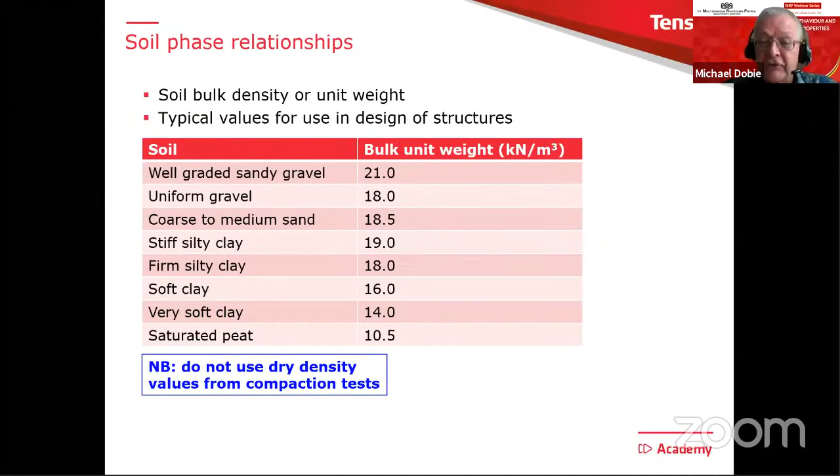But just a warning again: if you're using compaction test data to find bulk unit weights for design, say of a slope, then please convert it into bulk density using the water content. But two examples of how this can help you.

In this particular case, let's just imagine that those samples all came from below the water table and you're relying on those samples to measure the undrained shear strength. Then you have a bit of a problem there because 3 of them have dried out. They have a lot of air in them, and therefore you have to be very suspicious that you wouldn't rely too much on tests, say like an undrained shear strength test, carried out on those 3 samples.

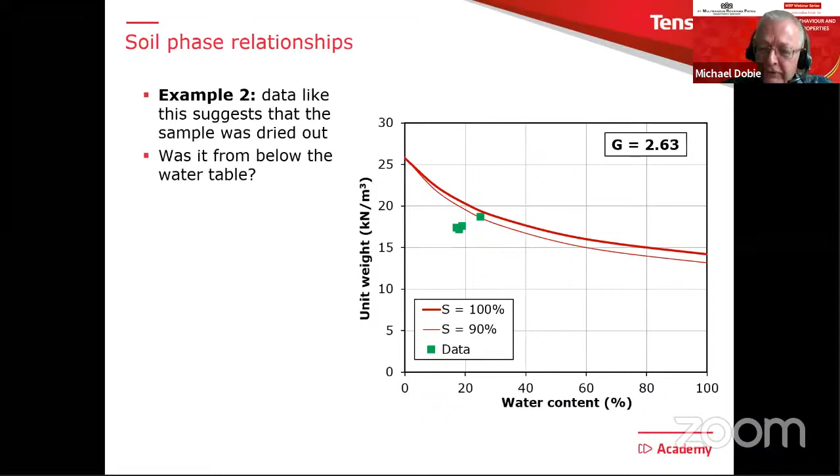And then the last thing I said I would mention would be a few words about soil permeability, no more than that, just a few words. But what I would like to do here is try to demystify the numbers, because permeability is given by a parameter K, and its units are meters per second or something like that, but it's a speed. It's a measurement of speed, the speed at which water can flow through the soil.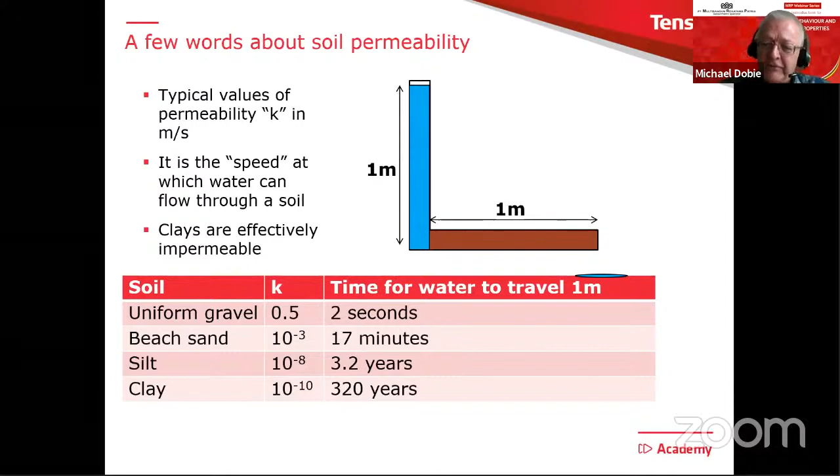You can see that in the case of a clay, it's over 300 years to travel through that sample. Of course what this means is that clays are effectively impermeable. And these numbers become incredibly important when we start to look at any analysis to do with the time effects of consolidation and so on, using finite elements or whatever techniques you want to use. So understanding permeability and getting the right values is extremely important. But that's just another way of thinking about what those numbers mean. So just remember, clay 1 meter thick, it takes about 300 years for the water to travel through it. So highly, highly impermeable.

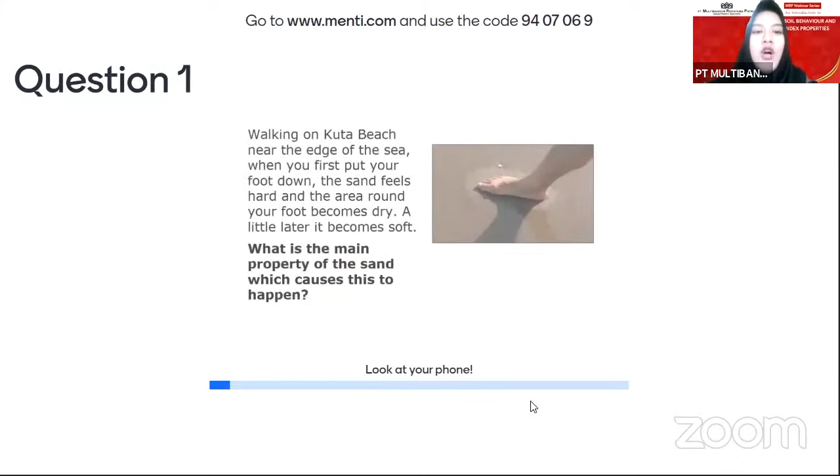Pertanyaan pertama. Walking on Kuta Beach near the edge of the sea, when you first put your foot down, the sand feels hard and the area around your foot becomes dry. A little later, it becomes soft. What is the main property of the sand which causes this to happen? Compaction by joggers, particle size distribution of the sand, dilates when sheared, or the sand is mainly quartz particles. Ayo, yang mana? Waktunya 35 detik lagi.

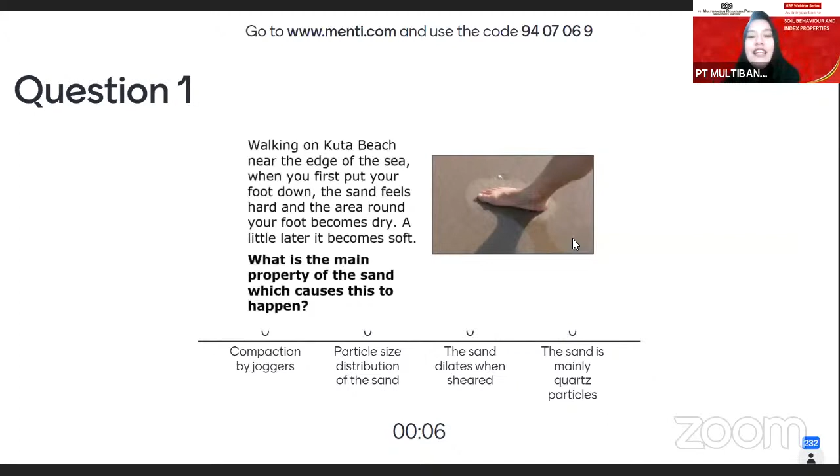Ya, sudah dapat jawabannya? 10, 9, 8, 7, 6, 5, 4, 3, 2, 1. Kita lihat siapa yang paling tinggi poinnya di pertanyaan pertama. Oke, jawabannya berbeda-beda, yang benar adalah the sand dilates when sheared. Kita lihat siapa yang memuncaki klasemen. Untuk pertanyaan pertama, dipimpin oleh James Utomo sebagai penjawab yang benar dan tercepat dengan 969 poin.

Waktunya 30 detik untuk menjawab. Siapa yang menjawab paling benar dan paling cepat mendapatkan poin terbanyak. Ayo, yang mana? Hadiahnya 150.000 untuk 3 orang pemenang dengan 3 poin tertinggi yang menjawab paling benar dan paling cepat di 3 pertanyaan. 3, 2, 1. Kita lihat jawabannya. Jawabannya adalah stress history.

Nah, ini bagian-bagian dari konstruksi flyover. Yang ini namanya abutment, fungsinya untuk menopang jembatan di bagian ujung-ujung jembatan. Oprit jembatan atau jembatan pendekat adalah timbunan tanah atau urukan di belakang abutment. Ini girder, struktur horizontal yang menopang bagian utama jembatan. Ini adalah pier, struktur vertikal yang menopang girder jembatan. Ini dinding penahan tanah, yaitu dinding penahan timbunan tanah di bagian oprit flyover. Tiang pancang atau bore pile adalah struktur di dalam tanah yang menahan jembatan.

Halo Sobat Multibangun, video kali ini kita akan membahas perbedaan antara insinyur sipil dan insinyur arsitek. Insinyur sipil menghitung kekuatan bangunan, insinyur arsitek mendesain keindahan bangunan. Insinyur sipil mendesain sarana dan prasarana seperti jalanan dan jembatan, insinyur arsitek mendesain tata kota.

Insinyur sipil harus mahir menghitung, insinyur arsitek harus mahir seni menggambar. Insinyur sipil tidak harus paham warna, insinyur arsitek harus paham warna. Kalau insinyur sipil bisa jadi konsultan atau kontraktor, insinyur arsitek biasanya jadi konsultan perencana. Bagaimana? Udah tahu kan perbedaan antara insinyur sipil sama insinyur arsitek?

Selanjutnya, rompi proyek. Ia memiliki material retroreflektif agar mudah terlihat di lokasi proyek, terutama di malam hari. Berikutnya, sarung tangan, fungsinya untuk melindungi tangan dari kecelakaan kerja seperti terpotong, tertusuk, dan terjepit. Selanjutnya, kacamata safety, fungsinya melindungi mata dari debu dan partikel-partikel kecil yang berbahaya. Dan yang terakhir, body harness, biar tidak terjatuh. Nah, jangan lupa pakai APD ya.

Halo Sobat Multibangun, udah pada tahu belum? Ada dua jenis pekerjaan teknik sipil, konsultan dan kontraktor. Cari tahu yuk perbedaannya. Konsultan kerjanya menghitung dan mendesain proyek serta mengawasi proyek. Kalau kontraktor melaksanakan proyek sesuai desain dari konsultan. Konsultan bisa kerja sendiri, kalau kontraktor pasti harus bersama tim.

Konsultan bekerja di kantor, tapi konsultan pengawas bekerja di lokasi proyek. Kalau kontraktor pada umumnya bekerja selalu di lokasi proyek. Nah, sekarang udah tahu kan bedanya antara konsultan dan kontraktor?

Sampai jumpa lagi! Halo Sobat Multibangun, kali ini kita akan bahas jenis-jenis alat berat yang digunakan di proyek. Yang pertama namanya ekskavator atau disebut juga backhoe, fungsinya untuk menggali dan memindahkan material seperti tanah dan batu.

Yang ini namanya dozer, fungsinya untuk mendorong material tanah ke depan atau ke samping. Kalau yang ini namanya kompaktor, fungsinya untuk memadatkan tanah atau timbunan. Nah, yang ini namanya dump truck, fungsinya untuk mengangkut dan memindahkan material seperti tanah, batu, besi, dan lain sebagainya. Yang ini namanya grader, fungsinya untuk meratakan tanah atau material. Gimana? Sekarang udah paham kan jenis-jenis alat berat yang dipakai di proyek?

Jadi ceritanya PT Kereta Api Indonesia akan membangun jalur kereta api dari Bandara Soekarno-Hatta sampai ke Batu Ceper, Kota Tangerang. Tantangannya adalah, pertama, jalur kereta ini melalui pemukiman yang padat penduduk. Dan yang kedua, harus lebih tinggi dari lokasi pemukiman. Maka multi-blok retaining wall system adalah solusi yang tepat untuk tantangan itu, karena multi-blok tidak memerlukan banyak alat berat yang bisa merusak dan mengganggu pemukiman penduduk di sekitar proyek.

Dan satu lagi, permukaan multiblok bisa dibuat lebih keren dengan mural. Gimana? Menarik kan?

Halo Sobat Multibangun. Perhatiin deh, kenapa kalau di proyek warna helm kok beda-beda ya? Ada yang warna kuning, ada yang warna biru, ada yang warna merah, warna putih.

Yuk kita bahas. Helm proyek warna kuning dipakai oleh pekerja umum dan subkontraktor seperti ini. Helm proyek warna biru dipakai oleh pekerja dengan posisi sebagai site supervisor kelistrikan dan operator teknis seperti ini. Helm proyek warna merah biasanya dipakai oleh petugas keselamatan dan kesehatan kerja seperti ini.

Selanjutnya, helm warna putih nih, biasanya dipakai oleh manajer, pengawas, insinyur, dan mandor deh. Gimana? Udah jelas kan Sobat Multibangun?